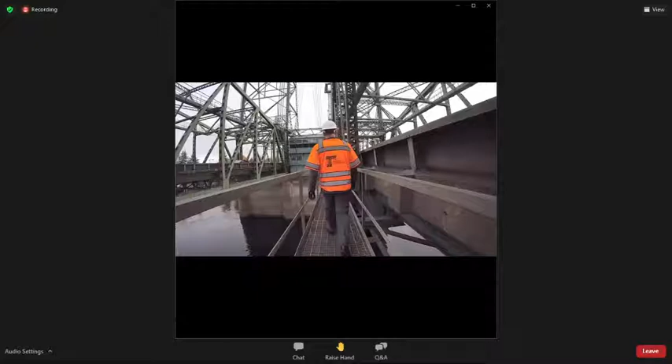The bridge today is owned by Oregon and Washington, and maintained by ODOT. We have a staff of about 10, and this includes the bridge tenders - they're the ones who raise and lower the bridge.

The excitement over the opening of the old Interstate Bridge in 1917 was enormous. It really changed so much in the area in the way that bridges can. Bridges are literally bridges between people - they make connections, they're economic, they're social, they're political. There's a lot of different elements that go into putting a bridge in. You can't really overstate how important this bridge has been to the Portland area, the Vancouver area, and to the two states. This gives us our connection.

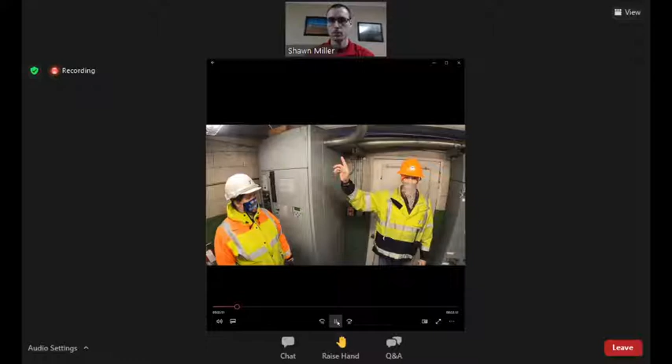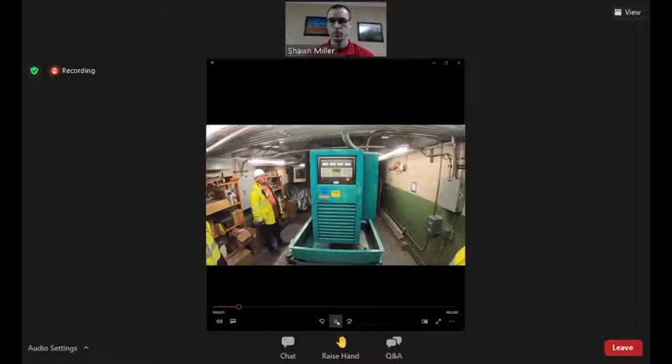Starting off in the electrical room of the Interstate Bridge, Mark goes over how the bridge is powered. This panel first, then the ATS, which senses whether we're getting electrical utility power. If not, it jumps over to the backup generator - a 250 kilowatt generator here. This one was replaced in the 90s; it had a smaller generator and they upgraded to this larger diesel.

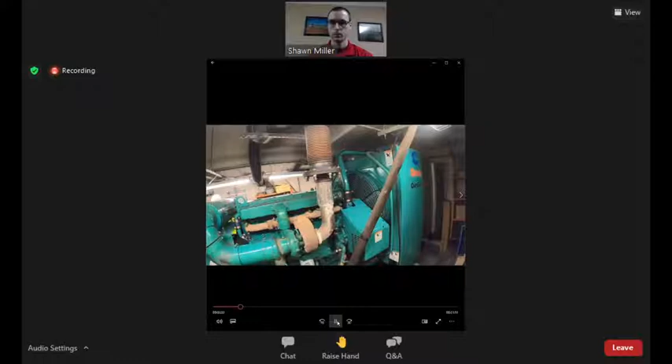How many kilowatts is this one? 250 kilowatts, yeah. It's got to drive both the fans and the lights and all the other electrical features, the house, all the traffic gates - so it's got a lot of power needs. Plus it has to have a decent enough push if there's a lot of weight on the bridge, snow, ice, that kind of stuff in the wintertime, wind. So this thing does it.

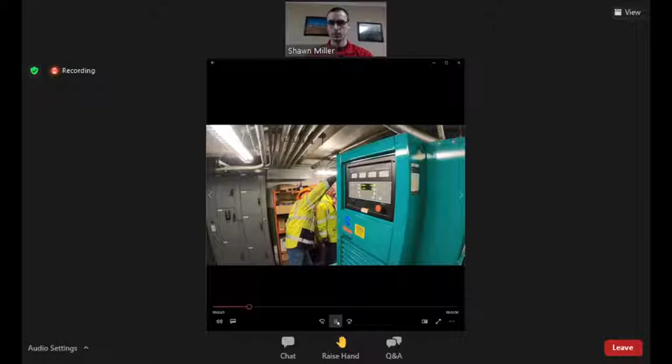And we're right under the freeway. Yep, this is span one of the bridge right here. Amazingly, it's this deck roof - it stays pretty tight here, I never get leaks. Yeah, you'd see it if it was cracked. The construction of this is pretty amazing.

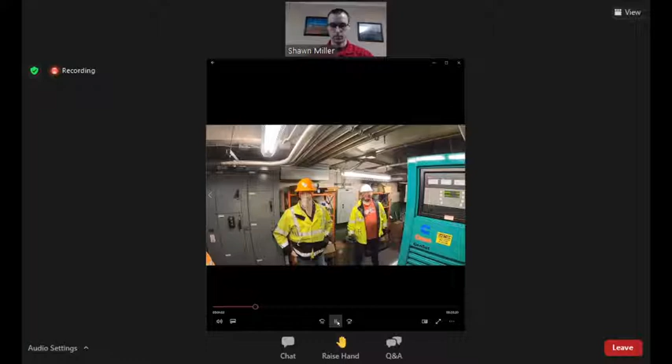How thick is the deck in between here? It's something that was built - I'm sure it's probably somewhere 6 or 8 inches thick, not more. It's something done in the 60s, 50s. This direction was built starting in 1956 and opened in 1958. So you know that construction - right there, all that stuff was built kind of lightweight. Nowadays it'd be 2 foot, high performance. So it's not heavy duty.

All right, in this section, the VFDs were pretty loud, but going through and just pointing out the variable frequency drives that take from that control power, lower the incoming utility power that comes in the initial room that was at the start, and sends that out to the electrical devices that we'll be seeing a little bit later in the machine room and other areas. Mark, anything you want to add to there?

Yeah, this equipment here, these electrical cabinets, are located on Pier 2, which is out in the river at the Bridge House. So everything we saw in that first room, all of that heavy power, comes to this room here, and this is where the VFDs, the contactors, and the Allen Bradley PLC computers are, ready to control all of the major controls that move the bridge, which you'll be showing in the next slides, as far as the actual machine rooms that move the bridge.

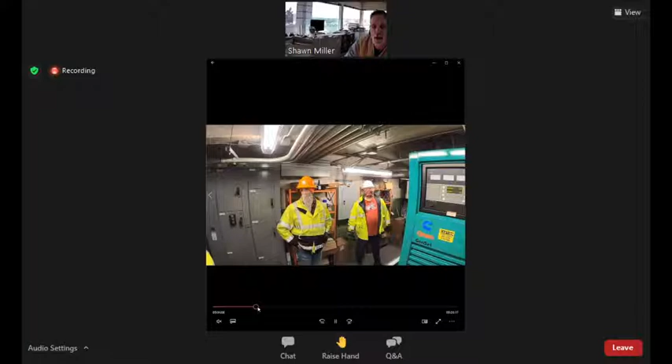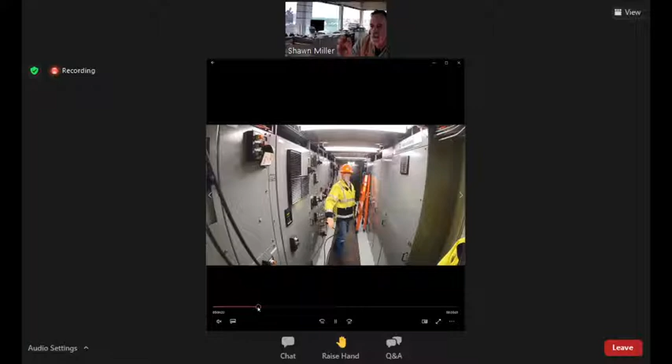And of course, there's a few other pieces of technical equipment on that bottom floor of the bridge house. There's 3 floors, and there's some heavy camera equipment and backup UPS equipment in that room here, and river gauge equipment, some National Weather Service equipment, some other computer and phone equipment, all our heavy phone equipment. So this is a massive equipment room that everything floods into to give us all of our needs to operate.

Thanks, Mark. All right, and it looks like we got 2 quick questions. First, how is vibration frequency measured? Do you have a certain limit that the bridge should not pass to prevent resonance?

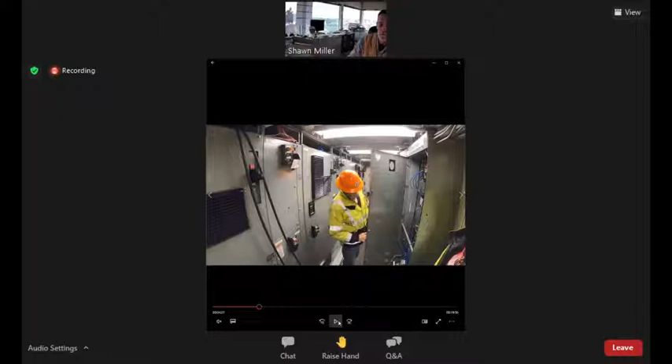I've never taken any measurement on frequency. It is just by the electricians, when the damage is repaired, we can tell just by the human feel of the amount of vibration, and you feel it when you're standing on that bridge. You can feel the movement of the bridge continually because of the traffic. However, I'm sure there is some wind vibration that the towers take into play when there's heavy wind. Like today, we've got some pretty gusty wind, but I've never measured the vibration. I just know that it's a factor.

Mark, do you know what the average movement of the bridge is roughly in heavy winds? Movement as far as flexing the towers? Yeah. No, I don't think it moves much. I mean, it moves, but it's not a quantifiable amount that we've ever been that concerned with identifying. Okay, thank you.

So yeah, from my side on the mechanical side, the question noted resonance in there. There's always the famous bridge, Tacoma Narrows. If you haven't searched for that video, that's definitely a resonance question. But like Mark was saying, the bigger problem, and what we see also on the electrical side of things, is just that constant vibration, that constant shaking, even if it's not ramping up to a resonance point, that constant vibration is slowly jittering stuff apart. So, all right.

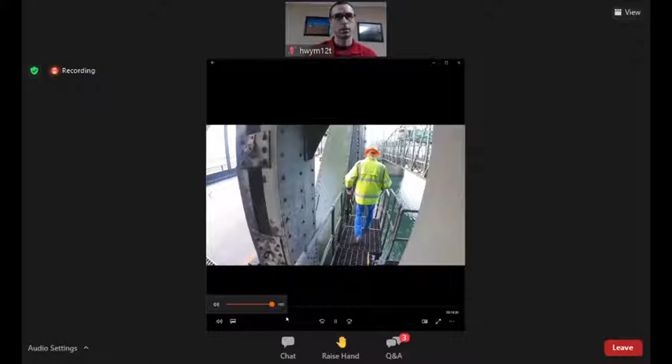So as we're walking through this section, just some commentary: definitely for anybody that's driven through a construction zone, for all of us that work on the side of roads or within right-of-ways, anytime you're driving through a construction zone, you're driving through our office in most cases. So definitely us on the engineering and technical side, we have to take that into account. Is the project site, the project itself, safe for the project team? Is it safe for the contractors and the owners that are out there? Is it safe for the general public?

It's definitely as much planning and preparation as we can do in that. It is 100% up to, in cases like this as well, the participation of the general public. So just as a general reminder, if you're driving through a construction zone or just driving in general and you see somebody on the side of the road doing maintenance, upkeep, or new construction, you're coming through our office space. So keep the speeds down if you wouldn't mind. We'd appreciate it. We're trying to look out for everybody else, but we can always use the help too.

So we're starting to step into the machine room, and the audio picks back up here in just a minute, and Mark starts touching base on the mechanical side, picking up from where the electrical now terminates and starts getting transferred into mechanical energy, mechanical and actual motion.

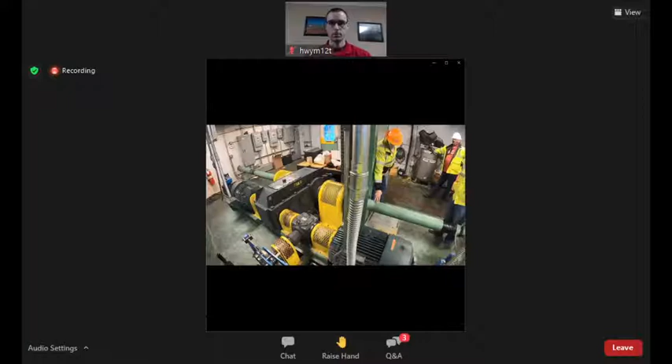This is the height gauge that the bridge tender would drive the bridge up and down to and identify how high he needed to lift for, and then come down. And it's a worm gear driving up and down, and we were able to save it and reattach it to this. This is not the original shaft, and so we reattached it to this shaft. And we still have it in operation, and we use it when we drive that little diesel motor.

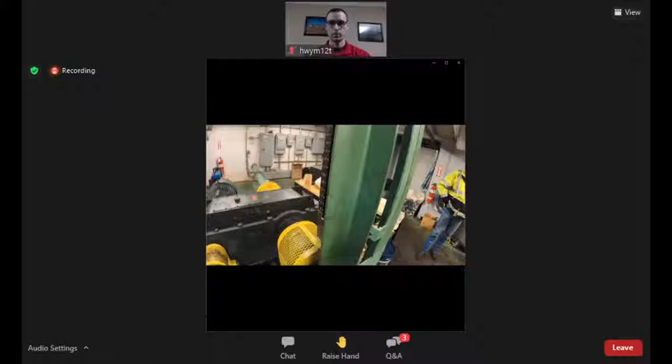That is cool. I was wondering about it. Yep, that's what that is. How long have you been in this role again, Mark? 20 years. Yeah, a long time. Yeah, it is good.

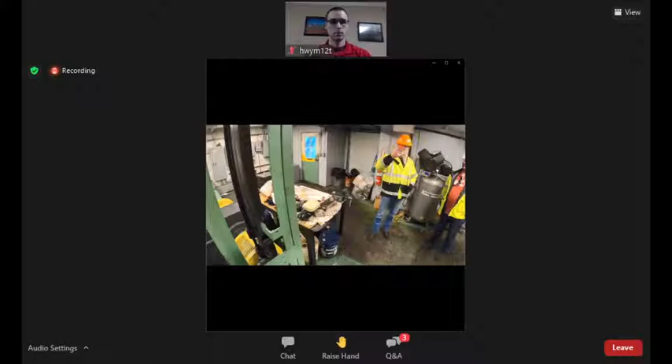And then this is because of all this new electrical equipment. This thing's climate controlled in here, insulated. None of this had these features. It was all steel walled and cold, and they had a small little coal stove, and the oilers would haul buckets of coal up here to keep warm in the winter, and I'm sure they didn't really have much for lights. They probably did things by little lanterns and stuff back then. A lot of carbon monoxide. Oh, yep. Yeah, exactly.

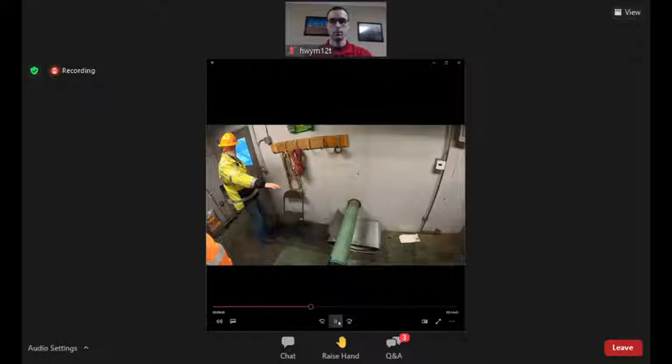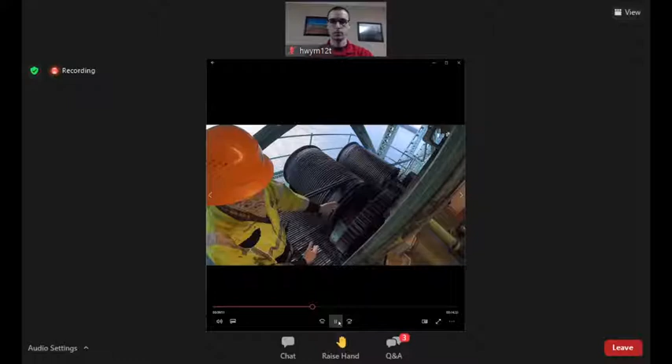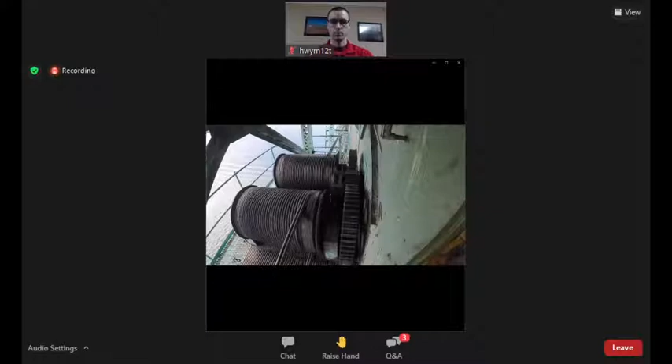So, but for the most part, a lot of lubrication needs, and then of course the output of this shaft ends up coming outside here to the cable drums and the drum gears and the pinion gear, the output, and then of course these drums are line in, line out cable winching. They essentially, you look at this similar system of winching, like log winching, or your winch on the front bumper of your pickup. Yep. You're just pulling. So essentially the thought process is you're winching the bridge.

All right, we'll take a brief stop here for 2 questions that came in. So what type of engineers work on this type of project? I guess, Mark? Mechanical and structural and electrical. Those are my 3 main sources for all the needs, the main needs of this structure. Did that answer? Okay.

Yeah, and then for the maintenance, I know Jamie's worked on some smaller, more pedestrian bridge and other items, and those definitely the civil, along with licensed surveyors, making sure it's within the right of way. And I know that we've worked with quite a bit of environmental engineering and hydrology groups for any time being around a waterway.

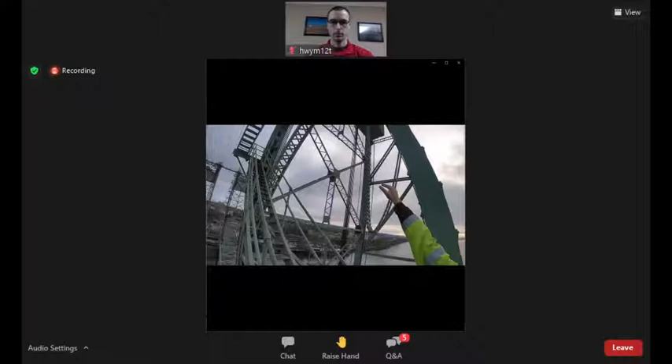the old motors and everything to not have to work so hard because they had a more challenging time of balancing the bridge back in their early days. All right, so continuing on up, and as Mark mentioned there, that counterweight cable off to the side. And again, just taking a look at the structure as climbing up through here, all of the piping, all of the cabling and other stuff.

Of course, you can't just run stuff straight across. You've got to take that as an engineer into account. How are you getting power to something that the whole center section of it lifts up and down? How, if you need to get hydraulics or anything else? Structure here is, of course, almost 300 tons lighter on each counterweight. These are about 650-ton counterweights versus these 900 here.

Okay. And of course, in the 50s, the Eisenhower period was approaching for interstates. So limitations on how heavy duty highways and highway bridges and stuff were to be built had to be taken into consideration. This was really building hell for stout railroad type structures. Because this thing used to support a rail. It had the center track with a rail trolley car on it. So it was built heavy duty, and it was Harrington Waddell, railroad bridge builders and designers. So this thing is really built heavy duty compared to this one. This one was designed and built by WashDOT, and it's a much lighter weight.

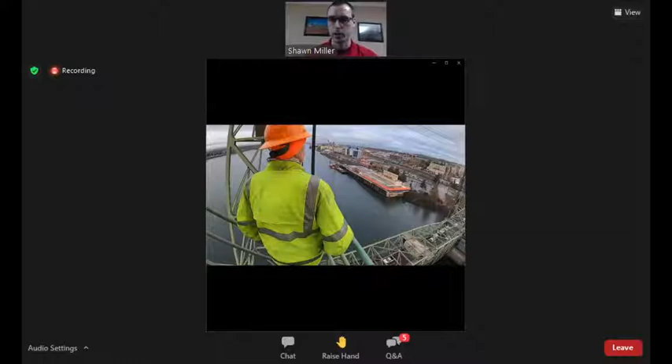No, not at this time. All right. So not at this time. All right, thank you guys.

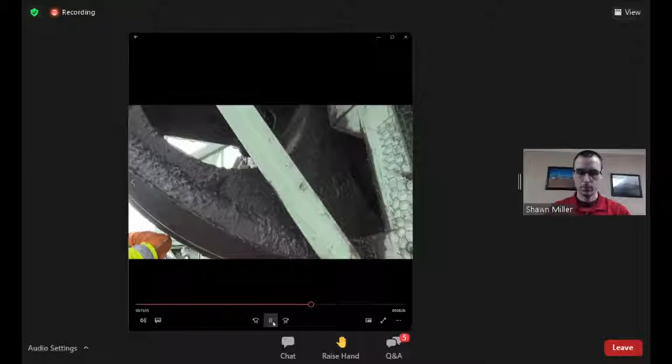So yeah, dropping into another ODOT release, doing another great explanation of what it is that I'm about to look at up at the top of the structure itself. Essentially at the top of the southeast tower there, next to the crane, it is the large wheel that is attached to all the cables, and it's the wheel with the shaft that goes in the center of the wheel, and then there's two big pillow block bearings. That is all one unit, and you can see the new ones on the barge, or which are called the

sheaves. The sheaves are the keeper of the cables. The trunnion is the special axle that is in the center of that wheel, attached with the pillow blocks so that it can rotate smoothly. That is a trunnion unit. And then that will go up and replace the older ones that are up there currently right now, that are from the old bridge times that came with the bridge back in 1917. The trunnion is essentially the axle that really supports all the weight of the cables and the bridge hanging on that sheave. The stresses have over the years put onto the outside areas of that axle where we've developed some small cracks.

Okay, so we've stepped up a little bit closer. We'll be going up the final flight of stairs to the counterweights here. Shouldn't be audio through this section.

And the part to touch on this, and I think Mark touches on it in the video here in a second. But those cables there, the lift cables, under extremely high tension. As Mark noted previously, I believe the east span is a counterweight of 900 tons and the west span 650 tons. So not all that is balanced on the cables individually, but a significant portion, so that it's balancing in between the bridge and what the bridge deck needs to lift, and yeah.

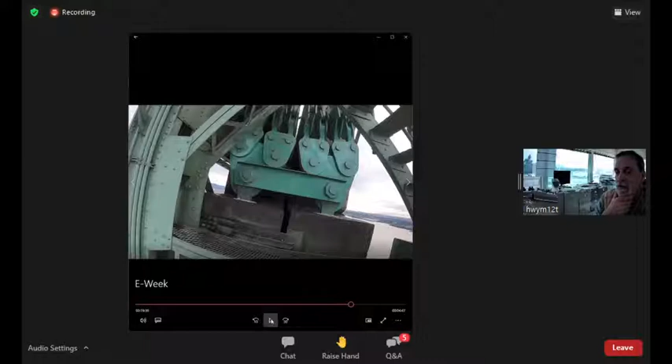Yeah, hey, Shawn, I'll add, so most of the aerial cables that are crossing from tower to tower are ODOT cables. There's some that are towards the west end there. Those are ODOT and WashDOT. We allow private utility companies to hang their cables and their communication routing up and over and across, rather than to get from Washington into Oregon. So, you know, your Comcast, your cable and your internet connection, telephone, all this Google and connection and all of that is coming through those fibers in those cables, and that's in efforts of not going submarine down underneath the riverbed. So they commissioned and permitted, and we've allowed. So that's what those cables are. So just a clarification.

Great, thank you, Mark. Right, we're just about to hop up onto the

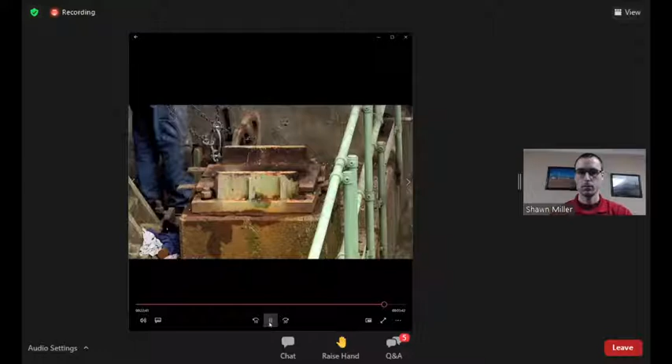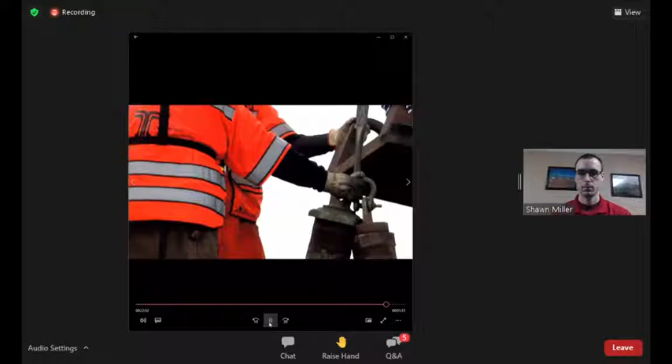We've been planning since last year, so we've been removing the feet and the pins. They are the foundation on which the span is able to hold still while traffic can move across it. The pins connect the bearings to the bridge, and the bearings bear all the weight. The wear and tear is the vibration. Vibration is a bridge's worst enemy.

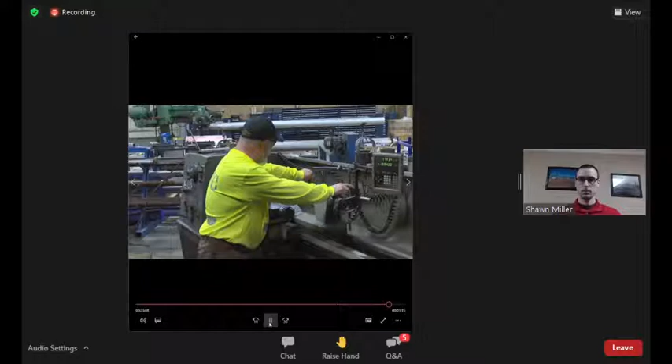Eight pieces that we ended up lifting and putting in the back of that pickup bed, and then that'll go to our shop. What we're doing is recycling. We're going to cut these bigger pins down to this size. They go to the machine shop and get machined and retooled. Probably do a light pass and then a light pass.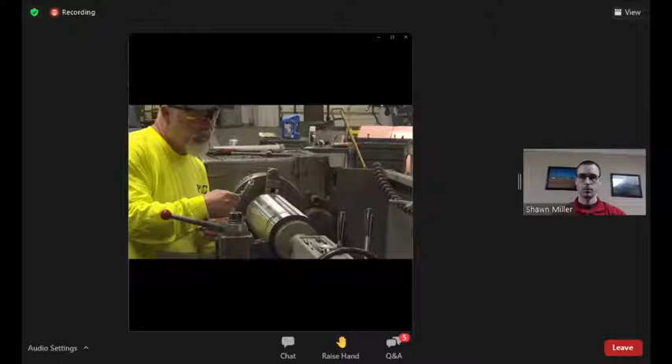Okay, and they're hot. They are going to take those pins and ultrasonic test them and make sure that the steel is all good inside and there are no hidden fractures that we can't see with the naked eye. If it all is good, then we will be reusing those. It's going to be close, and it is neat to see that old pin being remilled, and it's amazing to see what it actually looks like underneath.

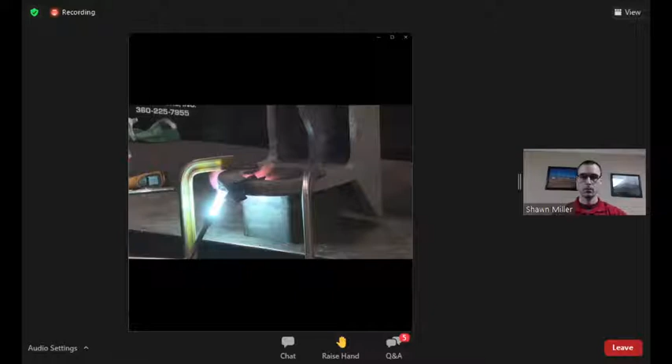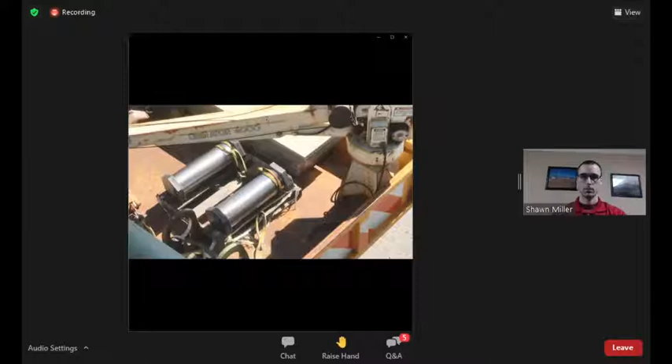So these are the bridge feet. Oh, he's getting ready to weld a broken crack. See the crack, the V, and they'll do a certified weld on there. Some of these parts are 50 years old and some are over 100 years old, so we're going to be putting those same parts back underneath the bridge. The pin's going to go over here, and then we're going to slide it in. Meanwhile, years down the road, we'll be replacing other parts.

All right, so that brings us to the end of the video portion of it. Hope you enjoyed a brief climb up, I think 230 feet to the top. Mark, somewhere around there, from the notes. So hopefully this was a little less stressful than actually walking all the way up to the top of it, but it is a nice view once you get up there. It's something that we can't take everybody to.

So jump over to the question that we passed on a little while ago: what was your path from high school to where you are today? I guess I can start off on that, and Jamie can hop in here. So for myself, I graduated from Oregon high school back quite a few years ago. Was seriously looking at either going into the military or going to school for engineering. Decided to end up going to school for mechanical engineering.